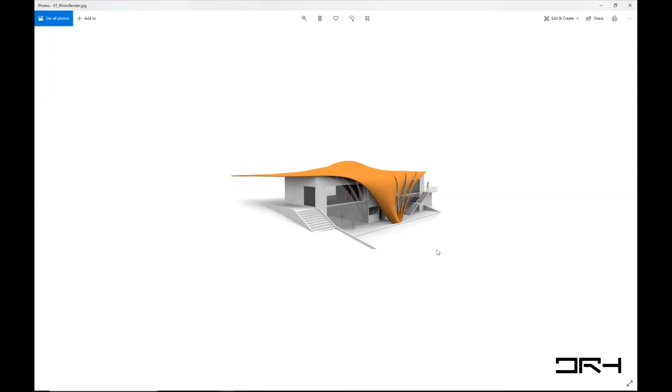By the end of the course we'll try to create that building. The reason I designed it this way is that it has both rectilinear modeling and freeform modeling, so we can cover as much of Rhino's modeling capabilities as possible. We'll start doing the modeling next class and go through the steps together until we produce something like that. This should help us cover the basics of modeling, but also some of the more advanced features related to modeling.

Of course, Rhino has a wide range of functionality other than modeling, but I don't think time will allow us to expand on different ways of modeling using, say, Grasshopper or plugins and other things, which are very important in Rhino. We treat Rhino like a geometry engine or modeling core, and its strength is that it doesn't get too engaged in functionality beyond that core, which is very stable and very powerful.

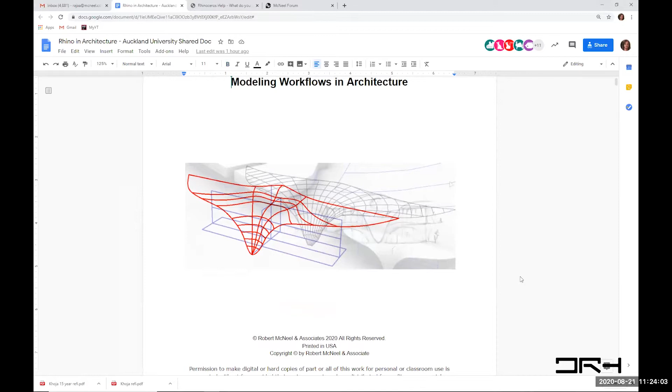What we will do is I provide that manual, or the handout. Eventually it's going to be about a 100-page manual, and the idea is that we're going to go through the concepts, loosely, but you will have a reference where you can go back and read it through and follow very carefully.

I'll show you where to find the information, but I'll also draw your attention to things like these boxes, where you can actually go and watch a video done by one of the Rhino team about that specific topic. So you will have plenty of opportunity to go back and revisit the concept at your own pace and see some of these videos.

And if there are missing videos and additional concepts that we need to create videos for, we can also create videos for those. That's part of my effort as well.

And if you find really awesome videos about certain topics that I haven't linked to, please feel free to go and say, in relation to commands, I found so-and-so video. Just feel free to add a comment and say, hey, I found this good tutorial, and link to it.

So feel free, this is a living document. You can use it as a discussion platform as well. And if there are things that are not very clear and confusing, just comment it so I can go and revisit and improve the document, so you guys find it really useful and rich, and it serves the purpose of learning Rhino.

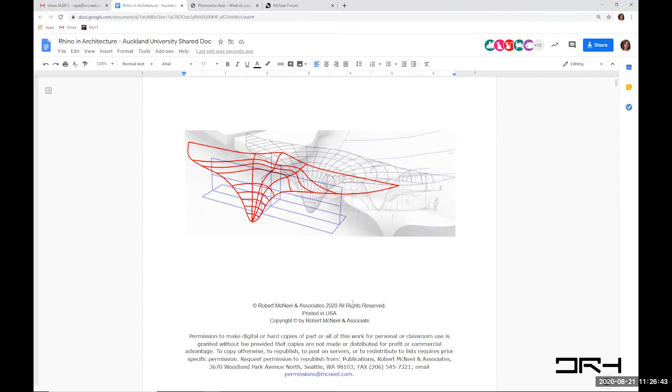Any questions about the format? I guess the one last thing is, once we open Rhino, feel free to follow along with me.

I'll try to go kind of slow. If I'm going too fast, always let me know. But also we will have short tutorials, like 20 minutes, and then 10 minutes of discussion, sort of format. So we allow more interactivity.

So we can have a bit of a flow when we do stuff. And then after that, we can discuss and revisit and re-explain certain things. This way, the 20 minutes can be more like, if it's recorded, it's easy to kind of edit.

Somebody logged in with a mic maybe open through the computer. Yeah, I think they muted. Thank you very much, I was hearing myself, like an echo.

So yeah, this way we try to get things done in one flow, and then we can have time to redo and discuss things as well. So this way we can keep things running within time.

How does that sound? All right, let's get right to it. So you know, right now there is the Rhino WIP, which is Rhino 7.

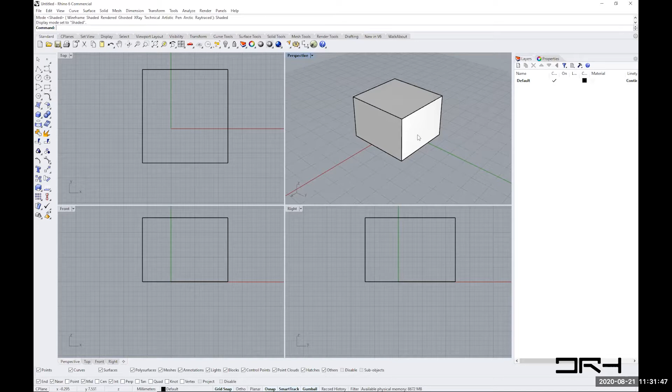So I'll just create something real quick. I know I'll go back and explain the interface, but I'm creating now a box, and now I created something, and I'm reflecting on it. I just want to change the proportion, or change the form of it. So I'm starting to reflect on my form, and trying to understand what I created. Now, I didn't create it with specific distances, I'm just trying to measure. This is like a 13-meter height, and I want to view it in a few different ways.

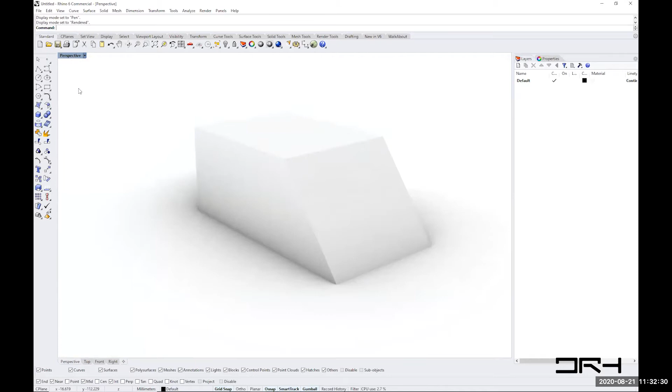And when I share it with someone, I need to print it out, sketch on top of it. I want to create a certain kind of field to it to investigate and interrogate my form. Rhino is really good at the ability to quickly synthesize form, reflect on it, adjust it, reformat it, and be able to share it with a tremendous number of formats.

So if you go save as, in this drop-down menu—you don't have to follow with me at this point, I'm just trying to give you a general feel to the environment—there are so many file formats. Actually, one of the main purposes people started using Rhino many years ago is because of its ability to export to a variety of file formats.

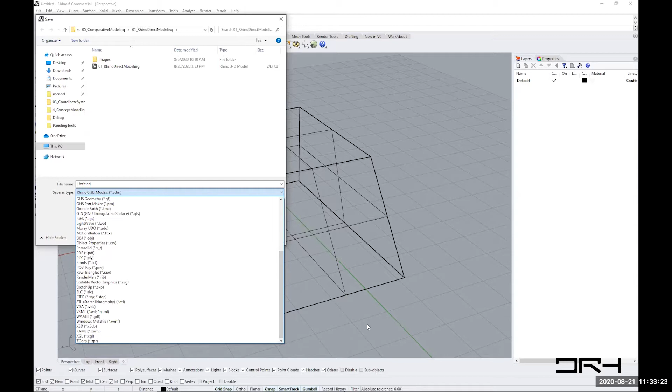And Rhino's file format is open source, and any program, any 3D program, any CAD can read and write to Rhino using openNURBS, at no cost on their end. So the Rhino developers are big believers in building community, collaborating, and open source, to be able to freely use the kind of application that is most suited to your need. This is why much of Rhino is open source, and it's accessible in so many different ways, and it's extendable as well. This is why we have a community of developers and plugin developers that write on top of Rhino.

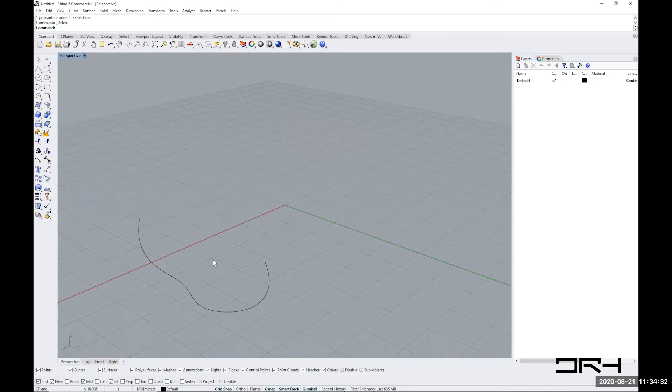One of the strengths of Rhino is that it uses NURBS modeling, meaning the ability to create freeform curves and surfaces and interactively modify them, and also very accurately represent surfaces that can be printed or exported at very small tolerances. This is why Rhino is popular in jewelry, which needs tiny tolerances, as well as cars and airplanes, which need high tolerances. The surface modeling ability is superb because of the NURBS representation of surfaces.

So this is just some of the general things about the modeling part, what kind of geometry can be created, and what the general feel of the application is.

But for you who are beginners and never used Rhino, I went very fast. So what I'm going to do is take a question or two, and after that step back and go really slow, explaining the modeling environment and the main vocabulary that Rhino uses. But if there's a question, I'm happy to take it.

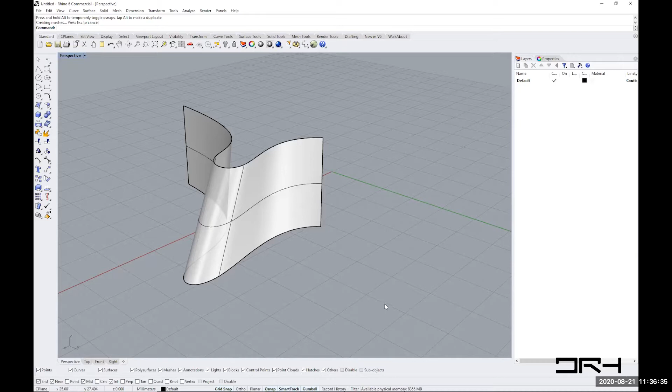Does that kind of give a wrap up of why Rhino and how Rhino, and when and why to use Rhino is as important as how to use Rhino. So choose your 3D modeling environment carefully and do it in a way that serves your purpose.

Okay, great. All right, I'll just close now and not save. What I'll do next is go through the modeling vocabulary, which is used by all 3D modeling software. Every single modeling software you encounter will have a way of dealing with all these different concepts, including certain kinds of workspace or organization.

So let's see what that looks like in Rhino. I'll go through the vocabulary and see how Rhino represents these different things. The workspace in Rhino, when you first open it, is the main graphic space where the geometry is shown.

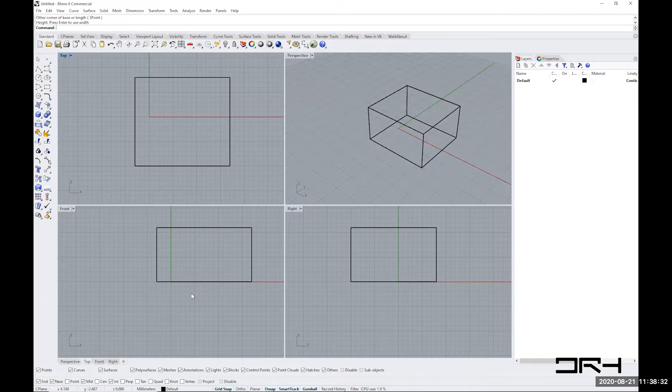You can think of each of these four views as a camera or a piece of paper giving you a certain view of your model. I'll create a small box so you can see what I mean. This is the top view of the box, this is the front view, and this is the side view.

You don't have to know how to do this, but I'll change the color so it's easier to see, and switch to a shaded, maybe more ghosted view.

So to orient ourselves, in the right view the red face is here, and I'm facing the red face in the front view, and that's the top view, and this is a perspective view. The projection here is perspective projection, while the top, front, and right are orthogonal or parallel projection.

This is how it's laid out, but it's by no means fixed. It's something you can change and switch between different parts using the lower tab.

If I double click on the perspective title, you'll see at the lower part there's perspective, top, front, right, and you can toggle between them. Double click again and you'll go back to the 4 view.

You can always change the sizes of your views and create a floating view, but you can always go back to your 4 views using that icon, which represents the 4 views.

Let's go to panel and help, and that opens the help panel. I can click on it—don't click on the title part, click on the help—and you can dock it and add that context help.

The help is tremendous because it has links to all the Rhino basics, and it auto updates—if you type box to invoke the box command, it updates to show details about the box command and sometimes small videos to show you what it is. Accessing help is important because even I wouldn't know a fraction of the commands Rhino supports, so having help is very useful.

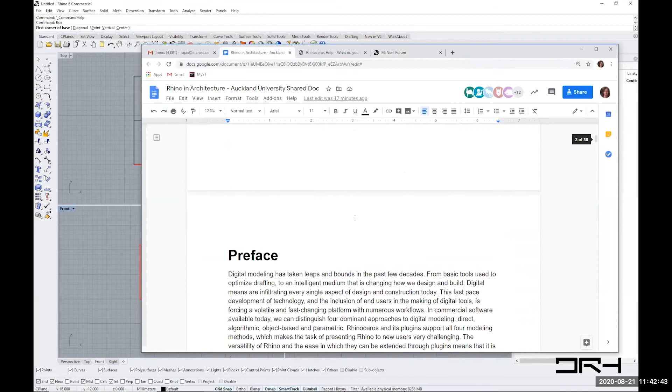As I mentioned, this area is what we call the panels, and each workspace has the title and which version of Rhino up here. Let me bring this in—you'll see this image that explains each part of the workspace, and there's a definition of each part under here. I don't want to overwhelm you with all of that, so to start with, in a nutshell, there are all the menus on top.

There is the command area here, which is pretty important—I'll explain that, we'll use it quite a bit. And there are the toolbars here, which is where you access all the commands using the icons. Toolbars also have the ability to expand with extra tools.

The bottom area is basically about modeling aid—what we call how you snap to geometry, how you select certain kinds of geometry, and also how it gives you information about your location in space. Down here there's some information: it tells you about the units you're using, which layer is active right now, and all these modeling aids we're going to go over as we go.

So that's basically all the different areas that you see. The thing about Rhino is that everything is customizable—you can pull and push things around depending on what you need, you can take things out. If I don't want any of that, I can just uncheck everything, and then the whole panel disappears if I don't use panels.

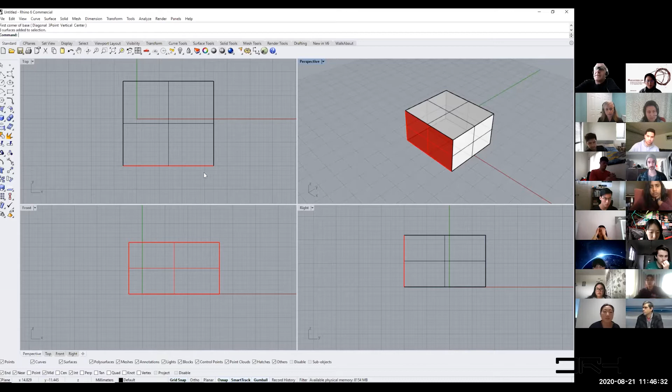One of the important things to get started with is the mouse functions. If you click on something, you can select it—I clicked on that and selected it. You see that little widget? It shows whether you have the gumball turned on or off down there. If it's turned on, you're going to see the gumball; if it's turned off, you will not see the gumball.

I just turned it off right now. So if I click on something, I select it, and if I hold Shift, I can select other things.

Once things are selected, you can drag them or do all sorts of things. This is one of the uses of the mouse. The left mouse click is to select objects.

If you want to pan a view, hold the right mouse button down and move your mouse, and that pans your parallel view. Remember, this is how to pan in parallel view only. These are the four views here.

If you hold just the right mouse and move it, it will orbit in the perspective view. That's how you orbit. If you need to pan in the perspective view, you need to hold Shift as well.

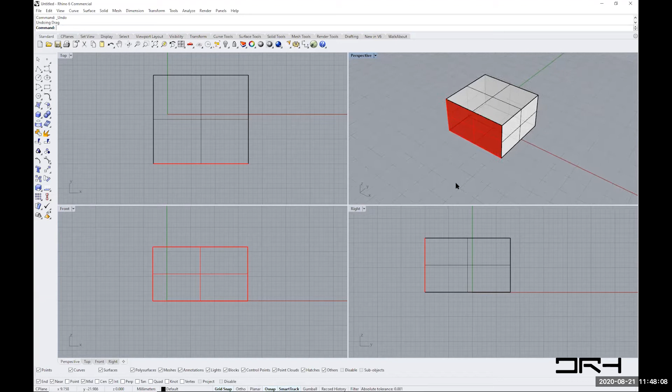In terms of the mouse, if you have a wheel, you can use it to zoom in and out, as you can see. And that applies in any of the views.

Sometimes you move things off the screen and don't know how to come back. There's an icon for that, which is zoom extent. It situates things in the center of your viewport, but if you right mouse click on it, it's actually going to center everything else. So these are just easy ways to get there.

The thing about Rhino is it has multiple ways of accessing the commands. But what are the commands? The commands are basically the actions or functions that perform certain kinds of operations, whether it's to create geometry, edit geometry, view related, rendering related - anything you want to invoke or communicate with the software is done through what we call commands.

Rhino provides four or five different ways to invoke the same commands, and the reason behind it is user preference and productivity.

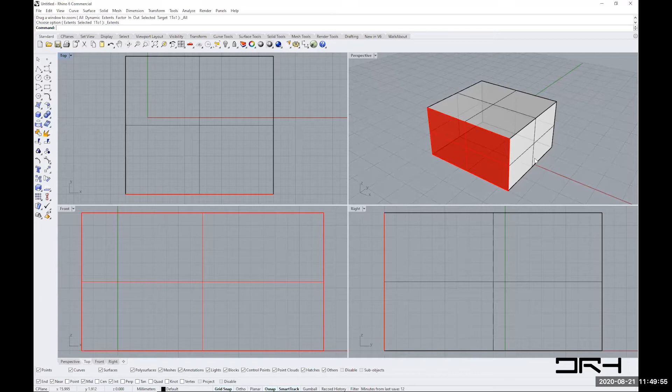So for example, you saw that we created a box. Let me Control A to select everything and delete. And I am going to create a box now in a few different ways.

The first way is to create it through the menu. You can quickly guess that a box is a solid, and at the top there is box and different ways to create that box. So I'll just go from corner to corner with height, and that's how I'm creating my box here.

I click on it, and then what happens is you need to notice this area - it's pretty important, which is the command area. It gives you instructions about what you need to do, and then you can go with the flow of the command.

For example, it says first corner of base, so we know we're going to create the base of the box first, and the first corner is what it's asking me to do. The things to the right of it are basically the options, the command options.

If I want to create the base a different way, which is starting with the center of it, or with three points, then I can start clicking on these options to create the box in a different way. For now, I'm not going to be very picky.

Remember, even if you're in the middle of a command, you can right mouse click and pan your view if you need to give yourself a space.

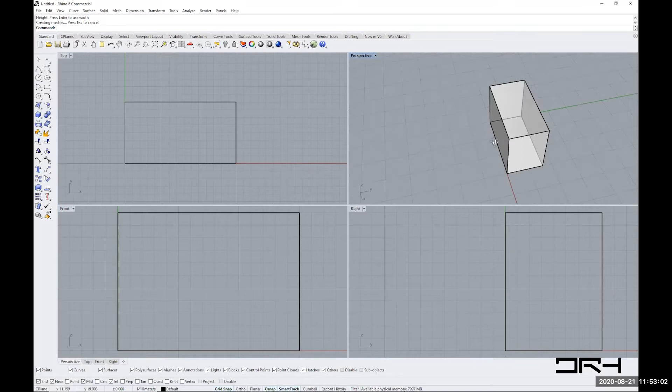But for now, just click anywhere and then your box is created. You can orbit around it to see it, but you also can change how you see it - there's wireframe, shaded, rendered.

Right now, I'm using the ghosted mode so I can see the other dimension as well. You can set it to ghosted as well if you want to see it the same way I do. And I can zoom in by doing the wheel. If you don't have a wheel, you can also hold the control key and then the right mouse to zoom in and out of your scene.

So I created a box using the solid menu dropdown, and then selected this command, which is the box command, using corner to corner and height.

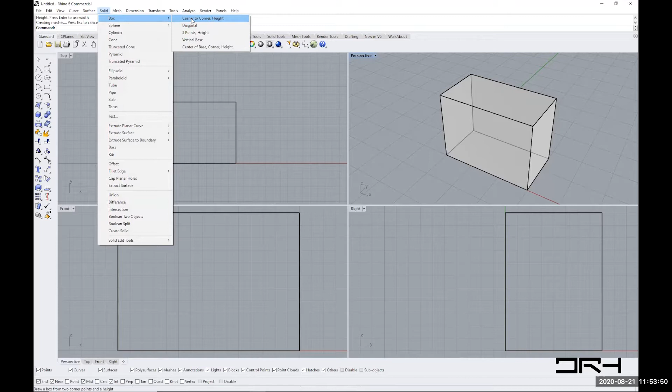All right, so let's do it again, and see if you can do it yourselves. This time, let's try to use something different, which is box using the center of the base and a corner and a height. So I'm going to call that command, go at the origin of my coordinate system, drag it, and you see how it is now. Using that center as the center of your box, you drag it out and then create your box.

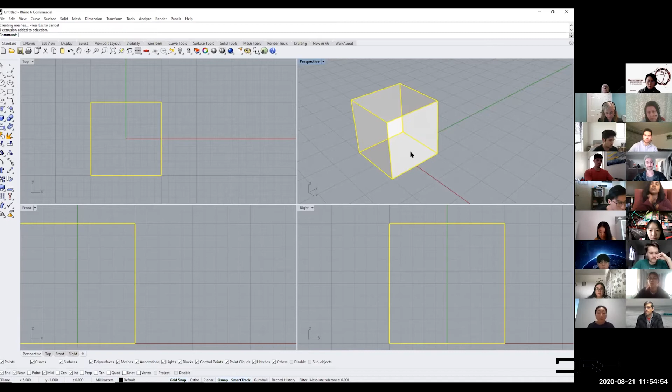So any questions about how to create a box using the menu right now? Should be straightforward. Now another way to do it - I'll just select and click delete on the keyboard, or I can type delete, and it does it. That brings us to the second way to create commands.

To invoke commands - and this is probably one of the most popular, that's almost exclusively what I use - I'll just drag this window down a little so I can show you the command area more clearly. This box where there is the cursor, this is the command prompt area, and what's on top is the history, which shows what is happening right now.

I can type in box - I type B, and if you notice, all the commands that start with letter B autocomplete. So I can go B, O, X, and this is the box command right there. Any command that has the word box or close, BO or things, it will list here. This is a really easy way to quickly type whatever command, especially after you become familiar with the set of commands you typically use. So I click on box, and the box command basically starts.

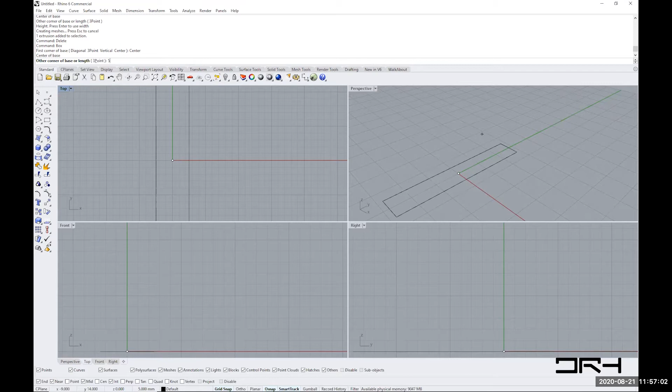Let's use one of the options. So I click on center, and now it's asking me for the center of the base. I click point, drag it out to other corner or length. That means I can enter, say 5, and that is saying I am restricting myself to 5 units along the x-axis. But I can also do 5, 5, which means I am basically going to go 5 units in the x direction and 5 units in the y direction. That helps me be a bit more precise. Or I can interactively drag and click on the base.

Then if you notice in the command prompt, it shows the word height. You can basically specify the height - you can say 10 units. And then if you press enter, then it's going to create a 10-unit height, right? Now, if I want to double check that the height is 10 units distance, I can type distance, and that brings up the distance command. It asks me for the first point, and then the second point, and it gives me back the number of units. As you can see, I'm using millimeters in my workspace.

An important thing - if you don't have your Osnaps turned on, you might not be able to go select exactly that corner. It's really useful to have the Osnap turned on. Once you turn on the Osnap, which is this dialog, it's usually docked down there, you can say I want to snap to certain parts of my geometry. I usually want to snap to all geometry - the end, near a geometry, a point, a midpoint, a center, a perpendicular, tangent, quad, knot, and vertices, which are basically for more to do with meshes.

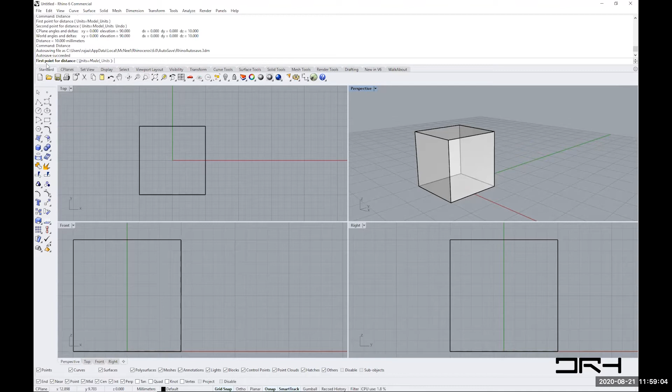But now I can just grab the top and dock it back down here. So this is where the snaps are, where I can snap, and this is why when I ran the distance command - distance again, press enter - when it says the first point, I was able to, when I come near - let me maximize that - when I come near the corner point, it just basically snaps to it. So I can use that as my first point, and then it snaps to the top point as well.

That's the second point, and now I can really measure the distance there. So this is what the OSNAP is really about, and this is what we call a modeling aid. Everything down there is really helpful as a modeling aid, and one of the parts is the OSNAP. It's really, really helpful.

We can go and explain other ones as we go, as it becomes necessary. So that's the second way of invoking a command. We use solid, box from the drop-down menu to create a box. We're also able to type box here and create it in our scene.

Now you can also create boxes using the toolbars. As you can see here, the standard toolbar on the left, if you go through these tabs, you'll see different icons appear on top. For example, curve tools, when I click on it, the left sidebar changes to include more commands related to curves. If I click on surface, it shows more surface commands. If I click on solid, it shows more of the solid commands. And the standard toolbar has all the common ones that are widely used.

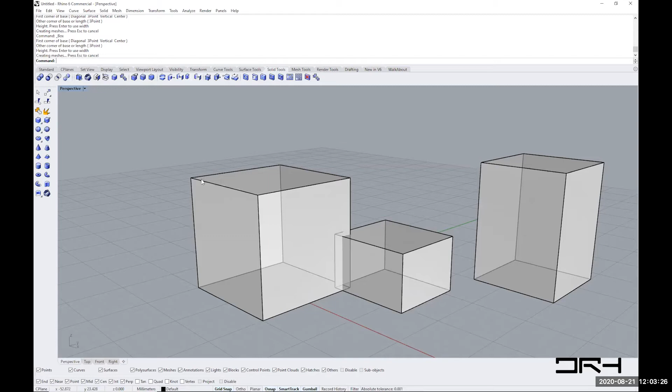There are other ways to create things in Rhino interactively, and let me go over how to do that. One of the ways is to use the gumball. See at the bottom here, if you click on gumball, then whenever you select a geometry, it's going to show that widget. I'll explain that in some detail, but let me show you some of the functions that a gumball helps you do.

For example, move geometry. Although you can move geometry using the move command as well, going through the process of selecting objects to move — I select my object, press enter, and then it asks me from what point to what point, and I move my object. But if you have the gumball open, once you click on it, that widget has arrows pointing in which direction you can move your geometry.

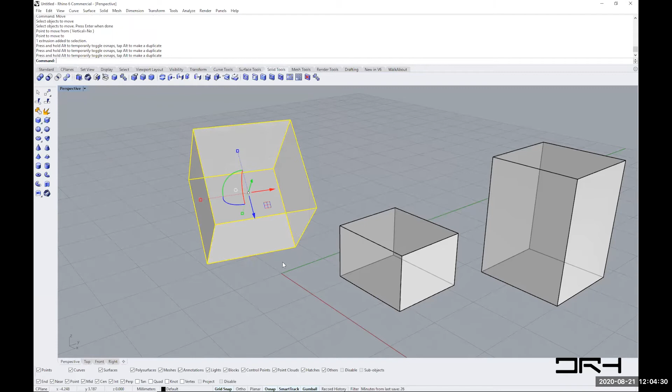There are other things you can do with these widgets, like rotate. If you click on the rotation part, you can rotate in any direction. And then you can also scale in one direction, and with shift held down, you can scale uniformly.

So all these are available as commands through the drop-down. For example, the transform menu has the move command, and also the standard menu has the move command right here. So the same command can be called in different ways — you can type the name move. Eventually, with time, you're going to create the workflow you're most comfortable with. I find typing the command names to work best.

And then I don't have to remember which toolbar, which menu they exist in. It's just a really faster way to access your commands.

So this thing is the filter. If you click on the filter, it's going to show you the selection filter - this is what it is. And if you click on the word filter towards the end to the right, it's just going to either turn it on or off. That did the trick. And what the selection filter actually does is limit what kind of geometry we can select.

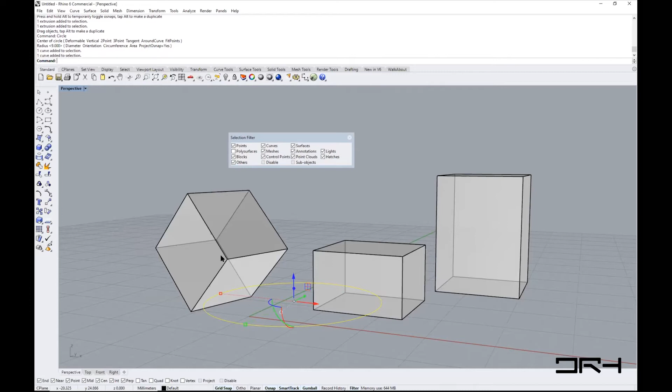One way to select as well is to click somewhere on your scene and drag a window - that's a window selection. Now you can see that I wasn't able to select any of the boxes, but I was able to select my circle here. So the selection filter is really useful to help you select a certain kind of geometry over another, especially when you have a crowded scene. I'll just check it and drag it back down there. Once you see this purple thing, you just let go of your mouse and it will dock it down there.

Okay, there are obviously other modeling aids, for example the ortho. The ortho will limit your ability to move your circle only in orthogonal directions, along the y-axis or the x-axis.

And just keep in mind, Rhino is super customizable. So even the direction of the ortho, I can change it to 45 degrees or every 10 degrees, so that will let me move things in certain directions, not just the X and Y direction. But for now, we're just going with the super defaults of Rhino as you open it. Then with time, as we become more proficient and comfortable with the environment, we can start customizing completely the looks, the feel, the set of tools.

We can even - let me just give you a sneak peek. If you click on the wheel, it will show what is called the pop-up menu, which is some of the common toolbars or tools that are used. And you can totally customize that.

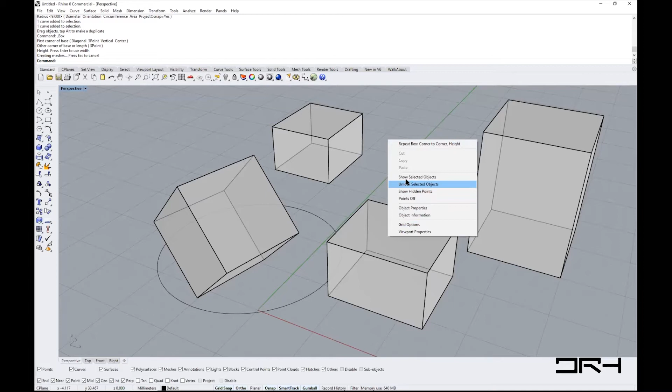If you right mouse click and keep it right, then you have another kind of pop-up, which shows you the latest command, but you can also add a set of commands that you like and use a lot to that menu. I don't mean to throw you off, but just to say that productivity is a big part of Rhino users, and it's super customizable and very easily so. So that's part of what you can do.

So the ortho, you can turn it on or off. The planar basically is going to restrict you to work within a certain plane, to draw within that plane. So that's the planar.

Record history is an advanced kind of functionality that we'll get to later. And the filter, we've just done it, turn it on and off.

Other than that, there is also the grid snap, which allows you to snap to your grid. The spacing of the grid, how to set it up, we're going to show you all that, but you can also customize that part. If you right-click on the grid snap, it shows a small menu to turn it on and off, and also to turn it off in a specific viewport or all viewports. So I can turn the grid snap off here, but if you go active viewport, you can also show or hide the grid lines if you wish.

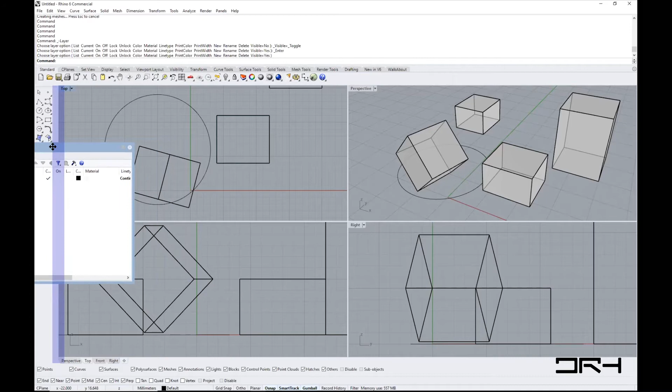So that's basically a general overview of the Rhino environment. I think the only thing that's usually shown is the layers, and you can dock the layers anywhere you like, to the right or to the left, and be able to draw within certain layers or organize your geometry there. But we'll get to that as well at some point. Any other questions?

Were you able to kind of catch up? Is that clear, or is it a bit overwhelming? I want to hear from the ones who haven't used Rhino before. Are you able to kind of follow? Yeah, yeah, yeah, yeah. Thank you.

I think it's kind of useful to talk a little bit about the panels, since we just opened the panels, and what they are for. The layer is obviously one of the essential panels that you will find yourself working with a lot. Basically, anything I have created is created within the active layer.

I'll just expand some of these so that we can see the details of what's in the layer panel. As you can see, the layer panel has some tools up there to create a new layer or do certain functions. But what's important is the active area, which if you click on this and click again, you can change the name of it, and this is your main layer. Rhino opens with at least one layer, usually named default.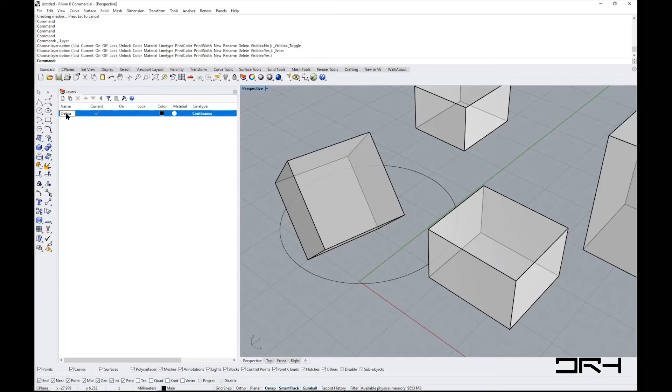It defaults to the color black, but you can change that color. Click on it, you show the wheel, and you can have any color for your layer. Typically, the color of the layer is the color of the object, so by default all objects take the color of their layer unless you specifically specify a different color for your object, and I'll show you how to do that. This checkbox shows that this is the current layer I'm on, and you can lock the color of the layer, but not the active layer.

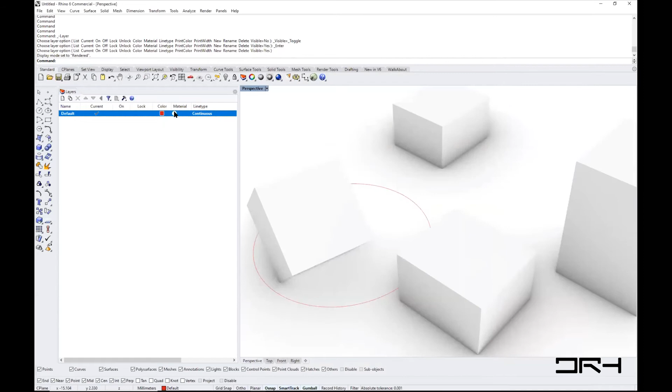You can change the material, and the material is only relevant if you are in rendered mode. Right now you can see the default white material, but I can change that if you click on it. I'll do something really basic, just change the color to something different. Oh, that didn't create anything - so it's using the default material, and I'm going to change it to a different material.

Say I want to use a plaster material, and I want the color to be tan. Okay, and that basically changed the material here to plaster. And if I go back to my shaded mode, everything disappears, because what's relevant here is the color of the layer. This is a working kind of mode, but the material - you can apply different materials, transparency, gloss, reflection, and all that - is relevant to the rendered mode. You can see the material applied to that layer is right there.

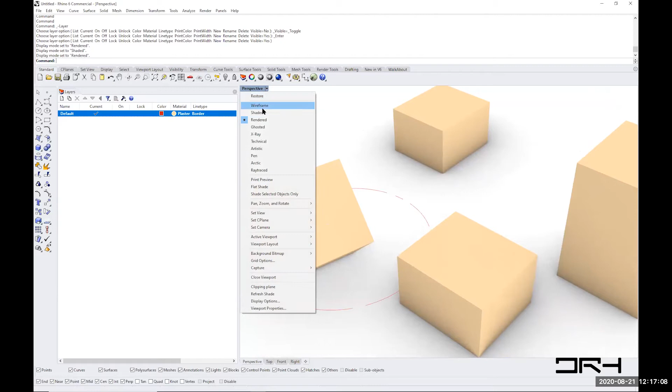The line type is relevant to curves. If you click on it, you can change it to dashed, and you can see that my circle now - let's go back to wireframe - is using that line type. I can change it to dashed, and the scale of it can be changed and all that, but I just wanted to show you the different things. Usually go back to the default, which is continuous, and that's basically the different parts of the layer.

You can create a new layer by clicking on the new layer icon, and that generates a layer, and by default it's called layer 1. I can change its color, turn it on or off, and lock it, which means I can't select any of the objects created inside it. I can also change its material and line type.

To make it my default layer, I just put the checkbox in there. Under current, click there, and layer 1 became the default. That means any geometry I create, say a box, see how it's black? It's actually generated inside layer 1. If I turn layer default on or off, all the objects there will be turned off. If I lock it, I cannot select the objects that are in that particular layer.

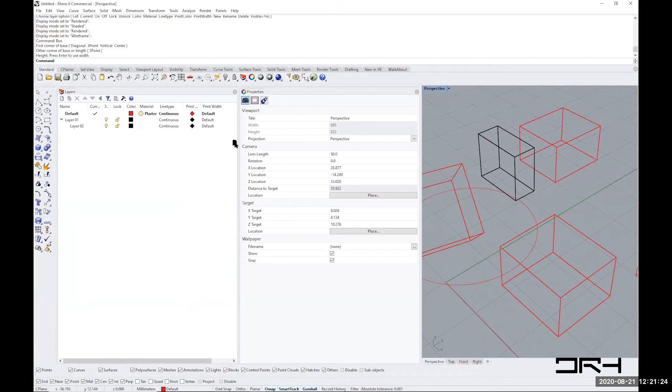The properties are context sensitive. So when I click on my perspective, it shows me the viewport properties. It's telling me you are in perspective, this is the lens length, this is your camera setting, and so on. This is all the information related to my camera and other information related to my viewport.

If you actually select an object, the properties update, and as you can see, it shows things specific about the object - for example, which layer it's in. I can also move it to a different layer. Say I want to move it to layer 2.

Let me change the color of it so it's a bit more recognizable. I can say that object, I want to move it to layer 2, and I want the display color to be by layer or its specific color. If I go through these icons on top, I can even change the material of that particular object - I'll apply specific material, maybe the plaster, to my object. Once I render, you'll see that despite it being in layer 2 with specific material, the object material I assigned is applied here.

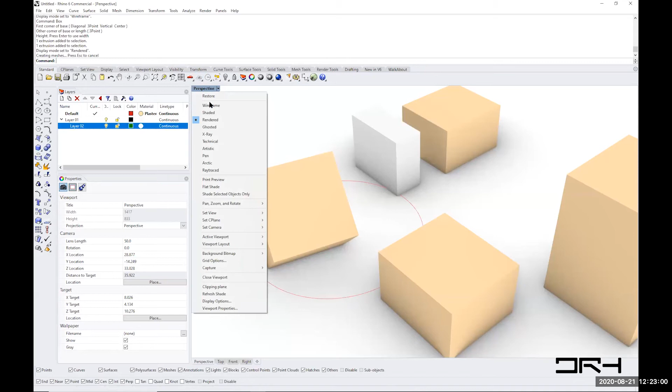So these properties are all related to the objects themselves - you click on an object and it shows you information about the object. If you click on details, it will tell you a description about the object, what kind of object type it is, whether the geometry is valid. We'll learn how to read and understand this information with time, but basically this is stat or information about your object itself. In programming language, we call this attributes - information related to that object.

So each object in Rhino has two parts: the geometry itself and the attributes. Properties help us set up the attributes of different objects, or give us information about viewports or anything active at any point of our modeling. These are the two panels that are extremely important.

As I mentioned, you can also access the panels from here, and you can have notes. Display is also a commonly used panel for people. The help, I'd say, is very important. If you're doing rendering, you might want these panels open and handy, and we're going to use some of those as well as we go along. But I recommend that you have the help panel open too.

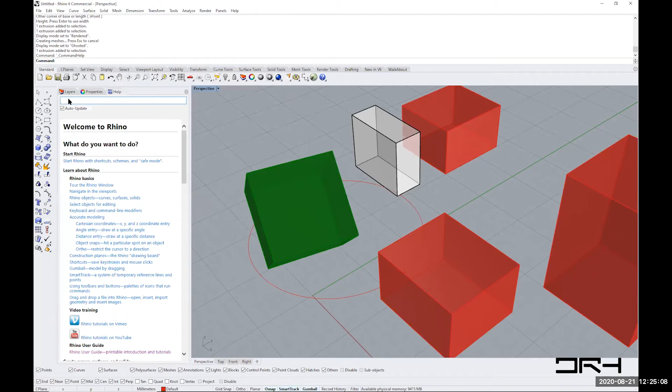If you click on the title here, you can dock it with the layers, and dock the properties up there as well. I'll move the help panel to the right, and then you can use the help to access any of the commands. You can type box, enter, and it will show you the box command. So if you want to inquire about certain commands, this is a great way to quickly reference the information.

Any questions related to panels here?

We have half an hour, so I will continue to loosely go through a few concepts that I find extremely important in any modeling environment, and I'll let you review the document between now and next week. We can start by going over any questions you have.

The two topics that I think are very, very important and relevant for us as architects are the coordinate system and geometry. Let me just delete those.

If we're not interactive with questions and answers, I think it's going to feel a little bit heavy with me talking too much. So anytime you want to break the rhythm, redo certain things, or inquire about certain things, please feel free to jump in.

As I mentioned, the beginning is a little hard and overwhelming, but with time, if you review the document and go through some of the video tutorials, and if there's anything missing, just comment on it or shoot me an email. Then we're going to make it as whole and complete as possible as a reference for you. I understand you can't get everything down today, but I'm just trying to give you the general feel and the important components of the modeling environment.

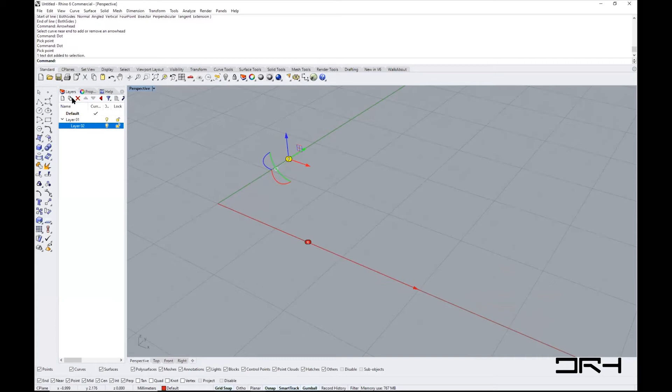That's the y-axis. I'm going to change the color of it. Go to properties, and instead of by layer, I'll click green. Now my dot is green. I'll use Gumball to rotate this, and change the color—oh, I needed to rotate with copy.

I'm just going to generate some geometry here so you can basically see the x-axis and the y-axis, and you can see that little widget at the bottom showing you the direction of X, Y, and Z. So the Z is going in that direction, and I'm going to draw a vertical line starting from here, going up, with an arrowhead.

And this is my Z-axis. I'll change the color to blue. So as you can see, this is the X, Y, and Z, and I'm using the right mouse down and I'm able to orbit to change the direction.

So we all deal in computers with screens, but in Rhino we are 3D modeling in real space, and we try to use units that are full scale of our model. So you can use meters, centimeters, millimeters, any kind, but you model your objects in a true dimension, basically world dimension.

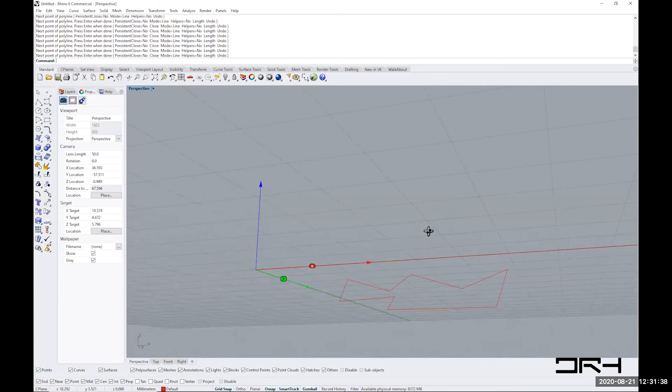Every viewport in Rhino, which is the active graphic space, has what we call a construction plane. The construction plane is where, if I say polyline, if I want to draw a polyline, by default it draws it within my construction plane, right? So the construction plane on Rhino in the 4 views, let me just take that down there.

In the perspective view, it actually defaults to the top world view, that's where it's located. And if I double click on my views, you can see this is the top view. The plane is the same as the one in the perspective view. But in the front view and in the right view, the construction plane is in a different location.

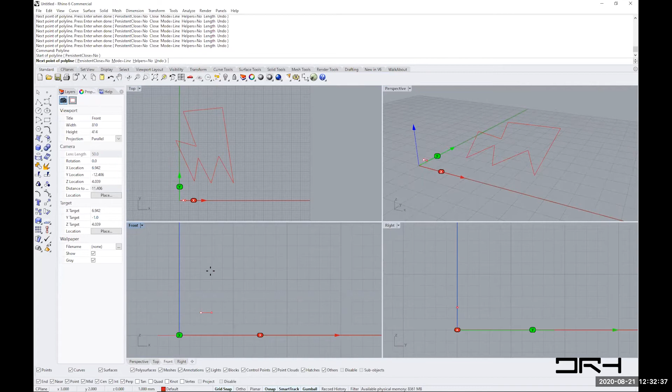So if I draw a polyline again on the front view, as you can see, it is actually creating it in the XZ direction. As you can see down the bottom here, it says XZ. This is the construction plane. By default, you will draw on that plane, right? And this is why having multiple views is useful.

Now if I draw polyline again, by the way, you can run the command again by either pressing Enter as a shortcut or right-clicking on the command prompt area and going to the most recent command that you ran. So that's polyline. And if I draw here, as you can see, it's actually drawing on the YZ plane, right?

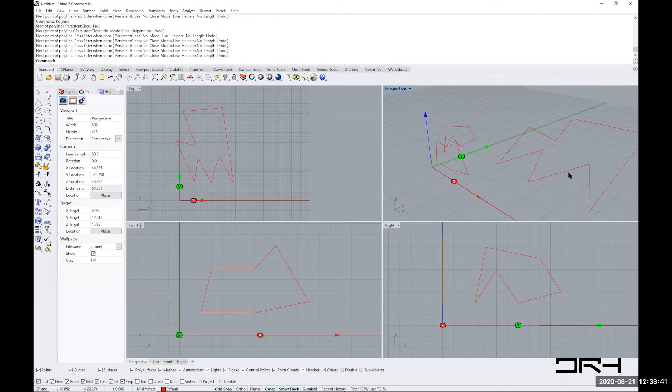So basically, Rhino allows you to define your own construction planes and where they are located, and be able to draw only within that plane, unless you are snapping to certain geometry, unless you are typing exactly the location that you want to create an object within. Let's see what that means.

So let me just delete those. What I'm going to do is select all these, and I'm going to say lock command. This will help lock these objects so they don't become selectable, but I just need them for reference there. Now with Rhino, you can do precision kind of modeling.

What do I mean by that? Say, for example, if we want to create a line, L-I-N-E, up there, the start of the line, you can either snap to a point, but you can type the coordinate of where you want your point to sit. And you can say, I want it to be 5, 5, 0.

If you have used AutoCAD before, you probably are familiar with that notation. So you can type the exact coordinate, and then next I can say, actually, the next point I want it vertically by 5 points. So I can go 5, 5, 5. And now you see I'm not confined to my construction plane because I specified a second point that is in the vertical direction, which has a world coordinate of 5, 5, 5.

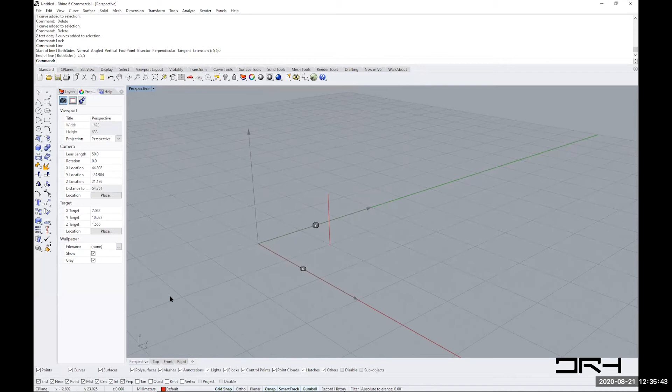All right, so this is what we call typing the coordinate directly. I have in the handout a really nice table here for you to reference. Let me go down to the coordinate system, this one.

This one has examples of how you type. The numbers you type, or the coordinates, you type X, Y, Z relative to your construction plane. So if you are in perspective or top, that's going to be X, Y, Z relative to your construction plane, and you can type the coordinates straight away. If you want to strictly have it as a world coordinate, you just need to type W in front of the coordinate. W0 means W000.

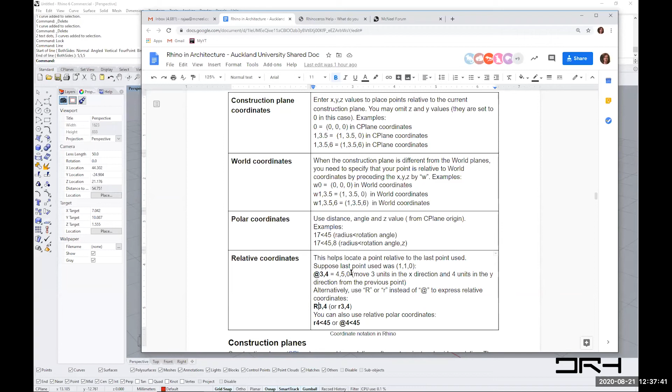There are a couple other ways to type coordinates, which is polar or relative coordinates, where you can use distance and angle, say relative to my last point that I created, I want 17 units at a 45 degree angle. The relative coordinates are also very helpful to draw or specify a location relative to the last point that you used. You just need to put 'at' at the beginning of the coordinate. You can get used to that notation. You can use it, or you can totally skip it if you have reference geometry to snap to. But this is really useful if you want to go precisely to certain locations, using that relative coordinate notation.

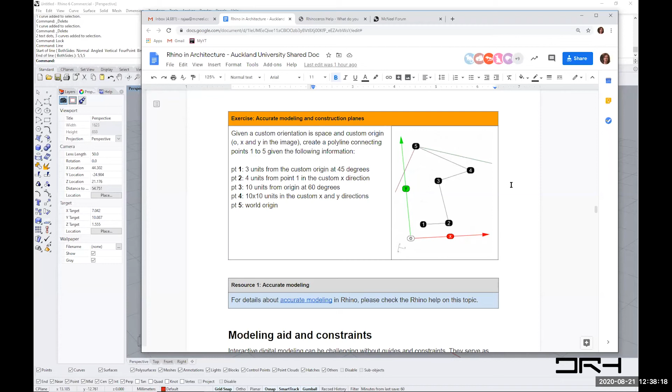Along with the construction plane, I'll explain a little further about it, and I'll leave you to try that exercise. If we have time, I'll go over how to do it using coordinate notation and the construction plane. That's pretty much all the time we have left, so I'll leave you all to explore the rest of the modeling aid. As we go through the other chapters starting next week, we can revisit certain concepts if they aren't very clear.

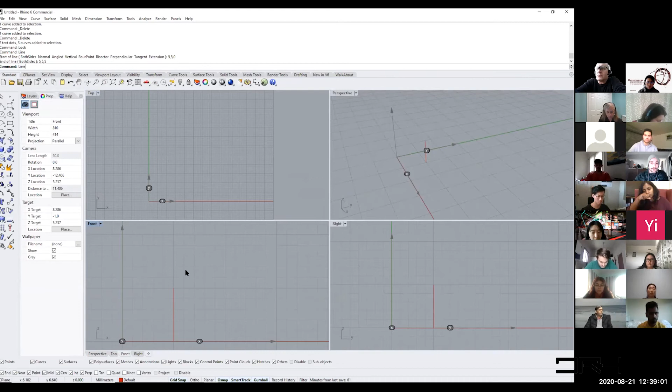Now that we understand how the coordinate system works in Rhino, I'm going to do something here to make it a little clearer as to what happens when you type coordinates. If I'm in the front view and I want a point, let me use the line command, and make sure you are inside the front viewport. I'll keep the perspective view open so we can see.

If I type 5, 5 like I did in perspective, the point is actually going to be relative, as you can see here, to my XZ plane, because I was in the front viewport. So that's relative to this particular construction plane.

But if I want to end up in the exact location, I can snap to it, or I can also type the endpoint as W, which is relative to world coordinates, 5, 5, 5, just to ensure I end up right here meeting that other point we created. So just be mindful, when you type coordinates, of which construction plane you're in.

If you're in the top or perspective view, that will be relative to the world XY plane, and you don't have to type W in front of the numbers, you'll land where you expect. But if you're in a random construction plane, or in front or right view, just be mindful and type the coordinates relative to that construction plane.

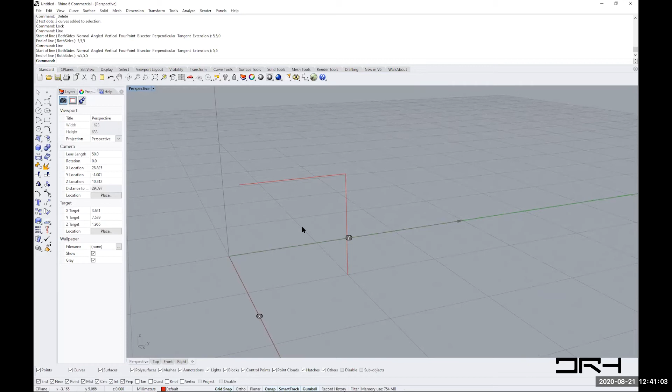Now, construction planes can be set up at any kind of location. For example, we just created these two lines, and suppose I want to draw a circle within the plane of these two red lines. It's actually pretty hard to draw, say if I run the circle command and snap to that point, it will by default be restricted to be parallel to my construction plane, going in that direction depending on whether I'm in perspective, top, or front.

Let me just do that. I'll run the circle command again, snapping to the intersection of the two red lines. Now if I'm in perspective, it's going to go parallel to my XY plane, as you can see here. If I go to the front, it's going to be parallel to my XZ plane. And if I'm in the right view, it's actually going to be parallel to my YZ plane. In this case, that's probably where I want the circle to be, so I can create the circle within those.

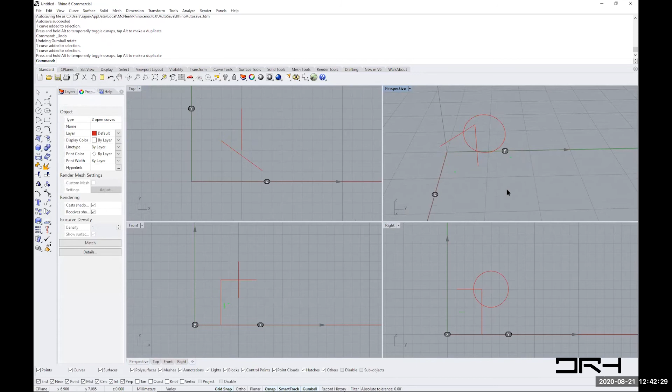But what if this is in a random orientation? Let me select both lines and rotate them. What if my reference plane is just somewhere random in space here? I created a pyramid, and I actually want to draw a circle on one of the slanted faces of the pyramid. Why don't we do that?

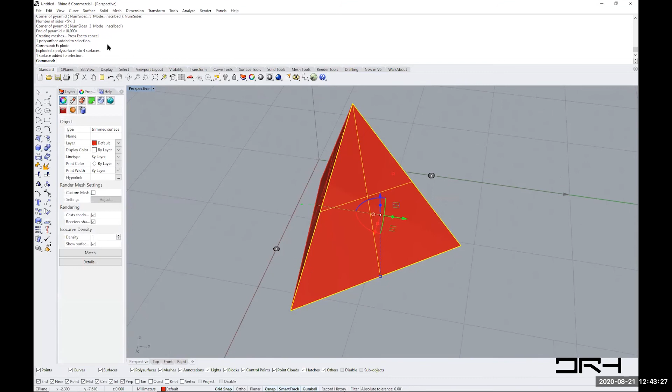I'll delete this, and create a pyramid, set it to be a three-sided pyramid by changing the option here, and that's my pyramid. Let's go to perspective view. As you can see, I want to draw a circle on that particular face. Let me explode this — we'll go through geometry in a bit — but I just want to change the color of that face. Going to properties, display color, I'll make it green so I can differentiate that particular face I want to draw a circle on. In Rhino, it's pretty hard to draw on that slanted face unless your construction plane is oriented in that direction.

The way to do that is pretty straightforward. You call the CPlane command, which has many options to orient to certain things. Say if I want to orient to a surface, I click on the surface option and click on my surface.

It's going to ask me where I want my origin to be, so I can drag the origin to the base of my pyramid. This is my X. As you can see, my grid has been reoriented to be along that face, and the grid, the XY, and everything has changed to accommodate that. The locked coordinates are still the world coordinates, but the new construction plane is right there now.

Now if I draw a circle, it's pretty straightforward to go anywhere here and draw, and it's going to land right onto my construction plane. Sometimes, and we'll do that in our house, because it's going to be somewhere in space and oriented somewhere, we might need to generate certain construction planes.

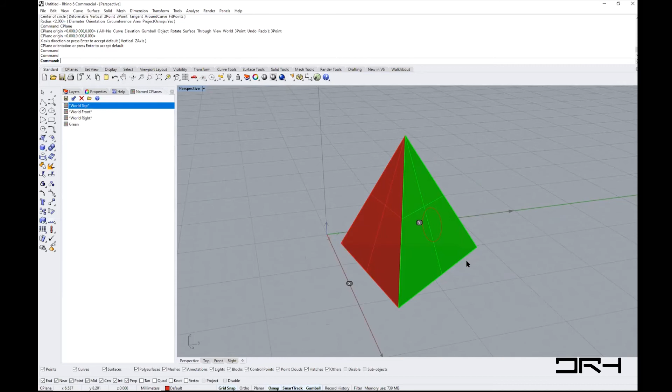Why don't you do a quick exercise now? Create a box, and let me delete this - create a box and change its orientation using gumball, which is rotate along a couple axes. Explode your box so that you have all the different surfaces. Select one of them, go to layers, go to properties, and change its color to something different, like cyan. I'd like you to orient your CPlane to land on that cyan so that this is the origin down here at this corner, and this will be the X and this will be the Y direction. Once you do that, draw a couple circles within that plane. Just a quick exercise, and I will silently go through it if you feel like you need a reference point, just to check that you're comfortable with generating construction planes. This is a pretty important step.

I don't understand how to get the axis lines on the same line as the surface. So what we want here is to create the X axis along the bottom line and the Y along that line. Alright, so that's the objective.

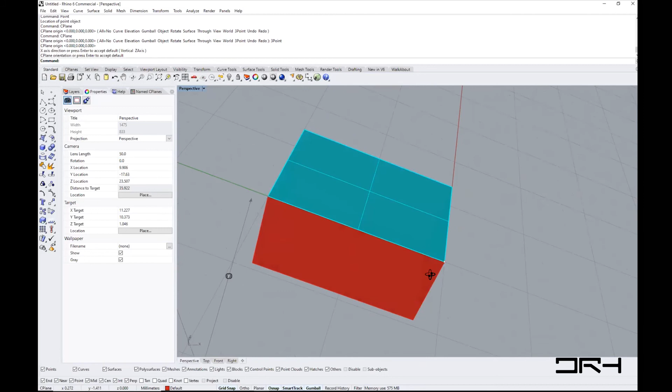Does that make sense? Yeah, that was perfect. Yep, the next step then. Save it. Save it, exactly.

I'll save it and I'll call it blue. And now blue is here. Even if I'm in a different CPlane, I can quickly just go back to blue.

And now if I just draw anything, let's go cylinder. It will be, by default, relative to that particular CPlane.

Did you create a saved CPlanes panel? The panel here, it's Named CPlanes. Oh, so if you go on this setting gear, and then you just check the Named CPlanes, it will be added to the tabbed panels there.

I see. Another way to access it is from the panels, Named CPlanes.

Yep, so once you have your CPlanes handy, you can start switching CPlanes and quickly orient yourself. So if you have an elevation, for example, in your model, or a roof, you create these CPlanes and give them meaningful names. Then if you need to draw anything relative to those surfaces, you can quickly invoke that CPlane and draw.

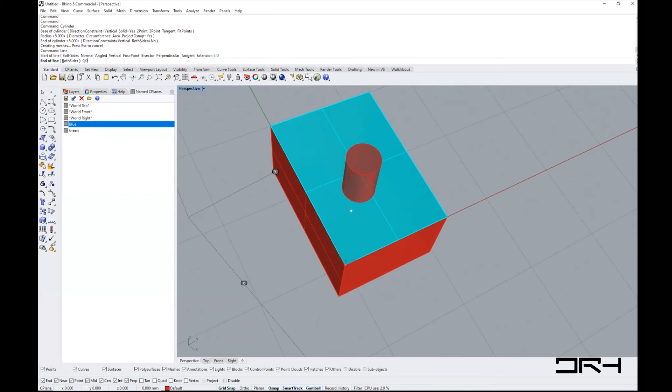Makes sense? And then even accurate modeling works. So if I just say, now that I'm in that CPlane, if I say, for example, line, I want to go from the origin of my CPlane—it's actually going to start from the origin of my blue CPlane. And if I want to go vertical to it, I can go 0, 0, 10. It created a line relative to my CPlane in these directions. So all the coordinates entered are relative to the current active CPlane.

Everything starts to work. Any questions about CPlanes? Yeah, we're good.

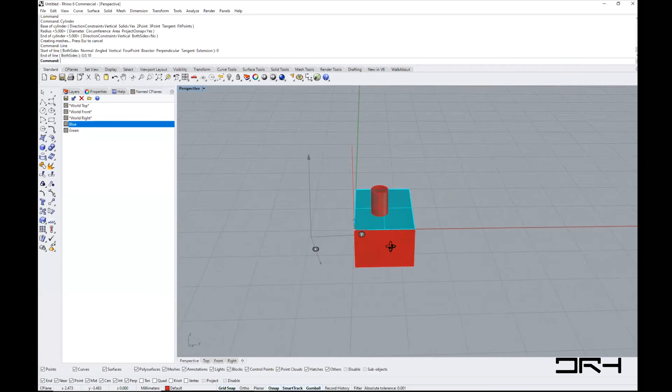So yeah, this is considered one of the more complex or confusing concepts in modeling with Rhino. If you get the CPlanes down, your modeling is super easy. Many people use CPlanes or use scaffolding. So if it's easier for you to snap to certain geometry, you can use scaffolding instead. This way you can just snap to that geometry, and the orientation is sometimes tricky, but you can manage to do that. The easiest way, if you know how to deal with construction planes, is the modeling becomes very, very easy.

I'm just curious—yeah, a different color. Say that again, Zane. Why is that surface of your box a cyan color with the rest of it red?

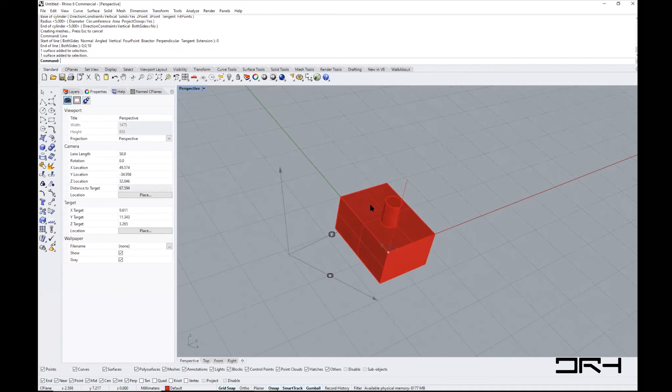Because I exploded it, just so that it's kind of easier. I can go by layer back. I selected that surface, and I basically changed in the properties what color it is, just so that we can see it more easily. That's all. Oh, thanks. There isn't any hidden purpose there, but yeah.

Just for clarity. So if you're comfortable with doing the accurate modeling here and see, you should be able to do that exercise. I guess it's a take-home exercise where you can generate a random, twisted kind of CPlane, and then you try to create that polyline. There is a full instruction as to what the requirement is, whether it's relative to the custom CPlane or relative to the world coordinates.

And just using this notation, you'll be able to start to create that. I'll do it first thing in our next meeting, but I just want to give you a chance to generate that. This is a really excellent video as well, so all the resources, all the videos, are there for you to go and review.

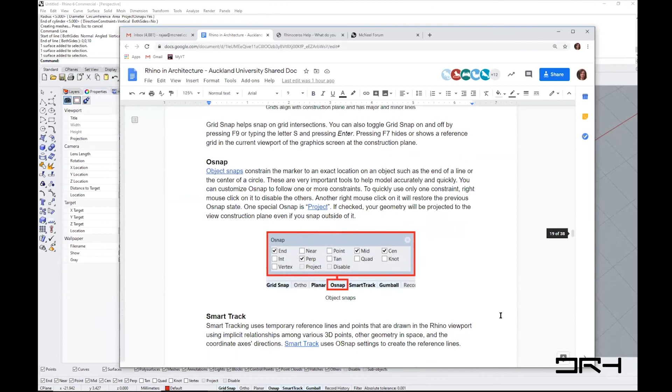If you have time, I will quickly go through that—a very important concept—but maybe we'll leave it for next time, because geometry is a huge part.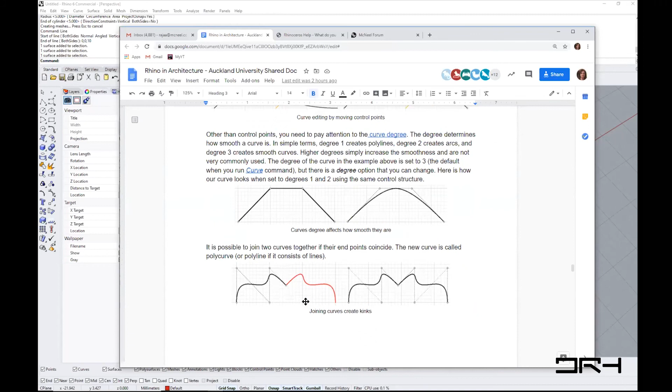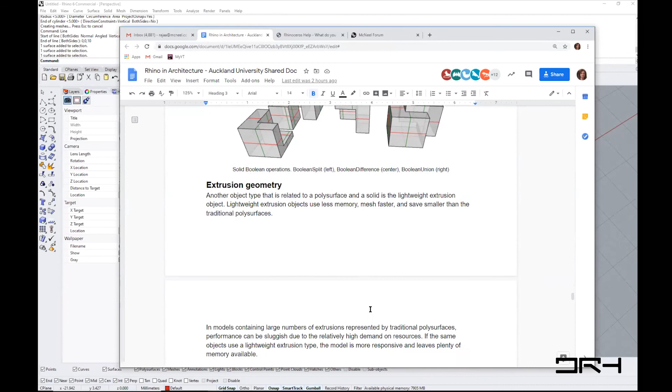Geometry is a very important part of how Rhino works, specifically NURBS geometry - how you create it, specify it, modify it, connect different geometry or join them, and surfaces and NURBS surfaces, including the concept of surface degree and trimmed surfaces. These are all very important concepts. Then there's solid geometry and what we call poly surfaces. Rhino also supports other geometry types like extrusion and mesh geometry.

However, in Rhino 7, there is yet another geometry type, which is subdivided surfaces. It's really powerful for organic kind of modeling.

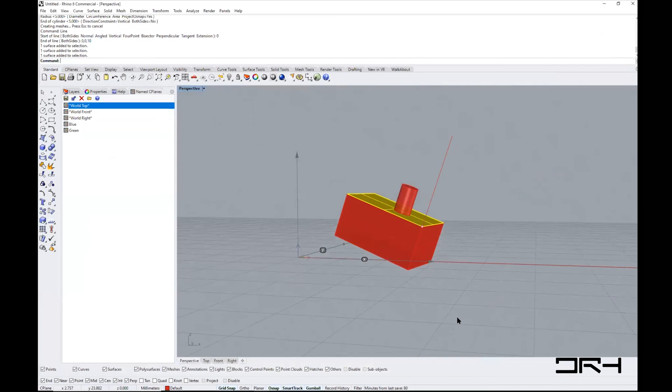Let me just go back to world coordinates here, and let me delete this. We've already done quite a bit of geometry, but the main thing to think about is that all curves, and the different ways to create curves, are under this menu. The drop-down menu is really nice for navigating the different geometry you can create with Rhino.

The freeform and control point based curve is probably the main command most people use, which is the curve command. You can type curve here to create a NURBS curve. If you look at it, you'll see a very important option here, which is the degree of the curve. We're going to create the same curve using degree 1, degree 2, and degree 3, and compare the different results.

I'm just going to go to the top view here. Let me minimize that. Before running the command, I'll create certain points which will represent the control points or reference points I'm going to use to create my curve, starting from left to right.

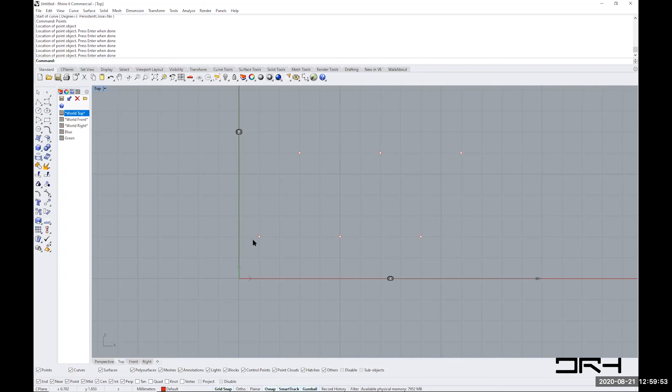Now let me run the curve command, starting with degree 1. A degree 1 NURBS curve will pretty much create what we know as a polyline, meaning the control points or selection points I use to generate the curve will line up exactly at the points I specified. You see these sharp edges, which we call kinks. This curve has a kink here, meaning it's basically broken at that point.

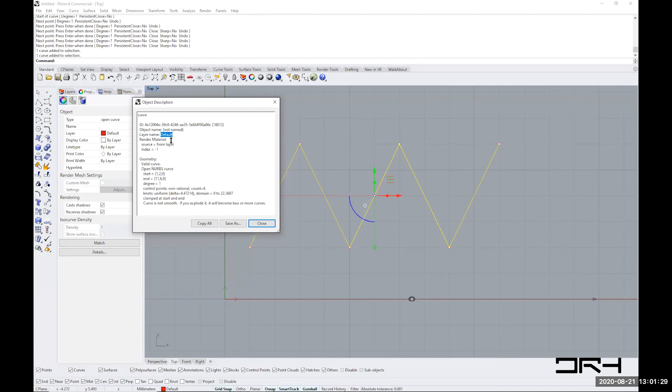This is one curve, and if I want to interrogate or understand it, I can go to Properties under Details. It gives me all the specifics about my curve - it says this is an open NURBS curve, where it starts, where it ends, and the key here is the degree, which is degree 1. It also gives more geeky details, plus the ID of the curve - its unique code name. It says it doesn't have any name; I'll show you how to put names to objects. It's in layer default, doesn't have any render material, and other related information.

So this curve we just created is a degree 1 curve. I'll run the curve command again, and this time change the degree to 2. I'll trace the same points here, and that generated a curve. Let me put it in layer 1, so it's black. You can see that the curve is a bit smoother.

What degree 2 NURBS curve means is that to generate this part, I rely on not just 2 points, but 3 points, creating an approximation or NURBS curve in between those 3. So these 3 points are the determining points to generate my curve. I don't want to get too much into the mathematical underlying notation of NURBS - we can get to that later - but you can see the curve is much smoother than the one I created with degree 1. The most common degree 2 curves are circles, for example - they are degree 2 NURBS curves.

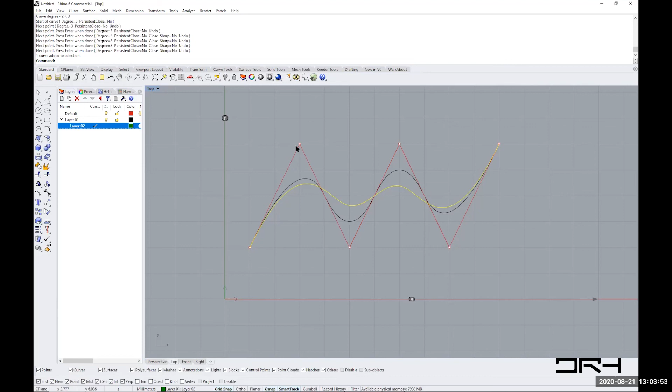You can see that curve is a bit more smooth. Each segment or part of the curve is now affected by degree+1 control points—1, 2, 3, 4 points define that portion of the curve, and then the next 4 points define the other portion. That's how NURBS work.

The thing about NURBS curves is that they can be super accurate. If you create a polyline, no matter how accurate or how small a tolerance you use, if you zoom close enough you're going to start seeing line segments. But with a NURBS curve, you can make an extremely smooth geometry or smooth curve.

The other thing about NURBS geometry is—let me just copy this. I'll turn on the gumball, click on the little arrow to move it up, but hold Alt, and you see the little plus, which means I want to copy. So I copied this.

If you click on it and type Points On command—or maybe it's on by default in your case—you can see all these control points, the original points I traced. These control points help me modify my curve. If I move them around, I'm able to modify my curve, as you can see, and it remains an extremely smooth curve. That's how control points can help me modify my curve. All right, so that's a NURBS curve.

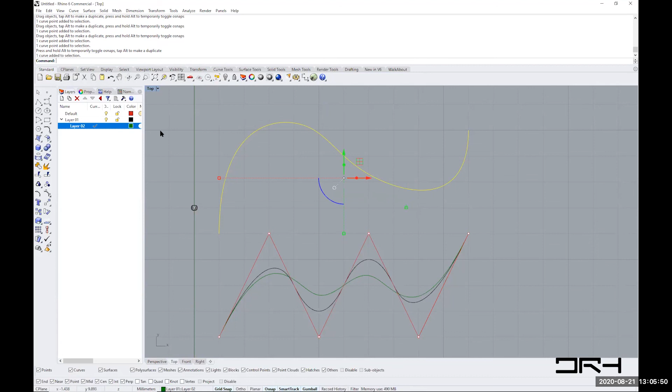A NURBS surface is basically a network of multiple curves. You can think of it as being—let me go to perspective here. I'll just copy that one vertically with Alt, turn points on, and modify it a little bit.

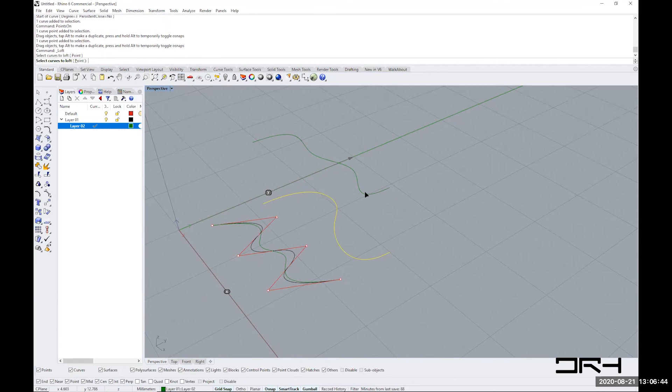What I'll do is create a surface between these two curves. We can go through all the different surface commands, but one of them is Loft—lofting is when you have multiple curves and you want to create a surface in between them. So I'm just selecting my curves and I'll go default, and as you can see, a surface was created.

I can turn the points on. As you can see, the control points are now showing, and just like we did with curves, you can start sculpting your surface by moving the control points as well. So that is a NURBS surface.

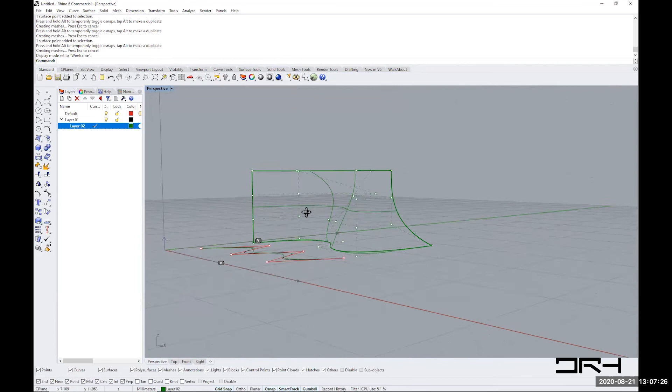Let me go to wireframe. As you can see here, it's like almost made of a network of curves. The lines you see going through are called isocurves. I can change the density of isocurves under Properties, Density 1. I can increase it to 2 or 3 to see more detail—it doesn't change the surface itself, it's just for viewing purposes.

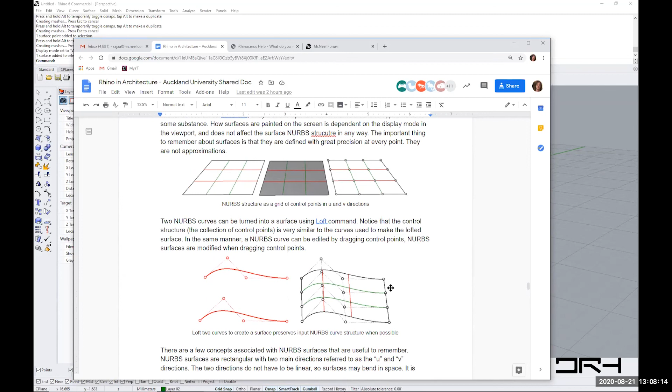The thing about NURBS surfaces is that the direction of the curve matters—what we call the UV space. This is a pretty involved thing to explain towards the end of the session, but I'll leave you with one thing: differentiate the different directions of a surface. This bottom part is considered one direction, and the top, the vertical parts, is considered another direction. One of them we call the U direction, and one we call the V direction. I'll probably have you review the guide first, and explain NURBS surfaces as a geometry in the next session.

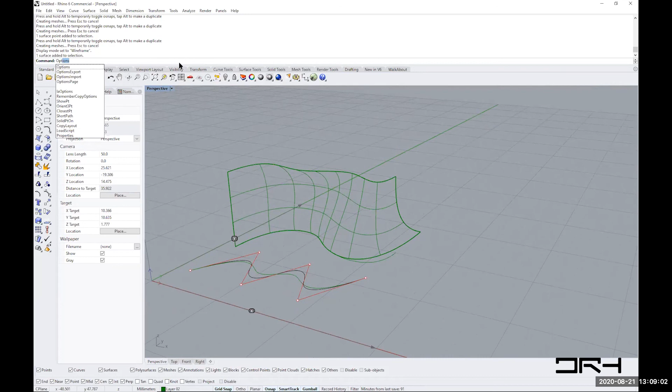One thing you can do is go under Options—this is a very powerful setting. Everything you want to set in your document, particular to that document or to all documents in Rhino, you can set up using the Options. I'll go down to View and Display Mode, go to Wireframe, and under Wireframe, under Objects, Surfaces, what I will do here is...